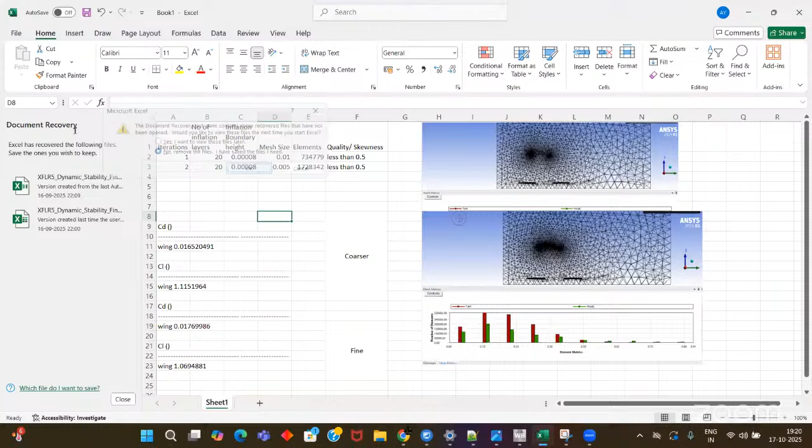So let me create another table wherein I'll write serial number, and mm, then CD, then velocity, then mechanical power.

And mechanical power is nothing but drag into velocity. So it is nothing but the multiplication of drag into velocity. So we'll be computing the drag here, FD. So let me write another way, mechanical power, CP we can write, mechanical power coefficient. Okay, so we'll be doing it for two cases, serial number one and serial number two. We'll be doing it again for 20 meter per second. Okay, both the cases.

And here is the performance sheet, and below that will be the mesh sheet where we'll write the serial number, then, sorry, number of elements, then element size, then inflation layer, then first layer. Okay, so let me wrap it. Okay, so this is also 1 and 2. So numbers, elements, and all that, we'll write it down.

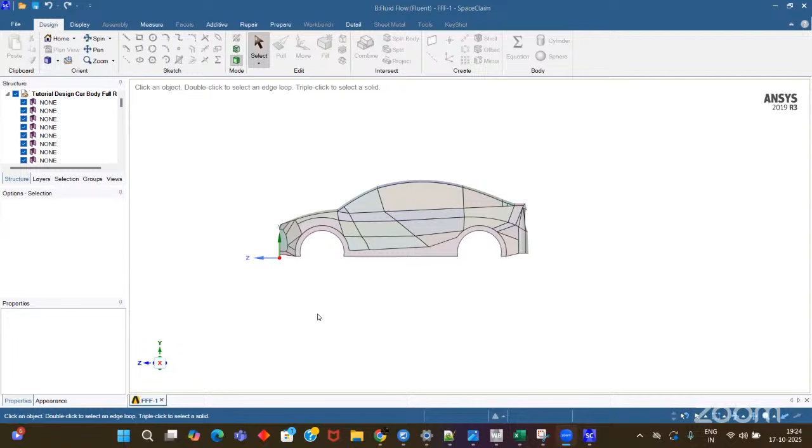So this is an electric vehicle for which we are trying to evaluate the performance of the complete system. So performance is basically very generic. So performance totally depends upon how you are trying to view that complete system. So I'm trying to view that complete system on the basis of fuel consumption and efficiency. So definition lies on.

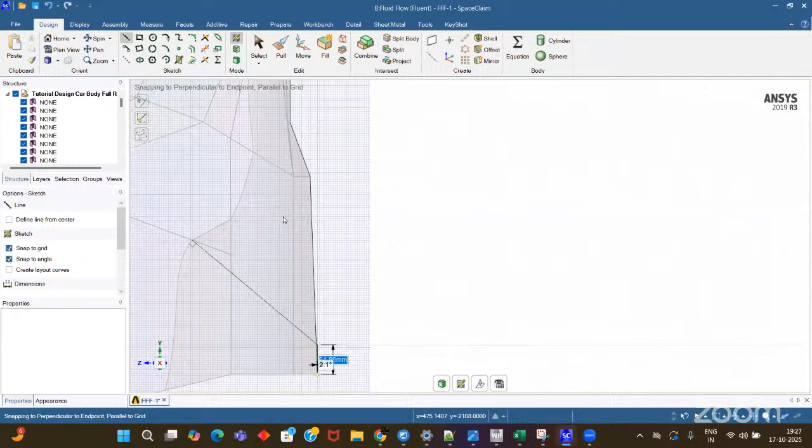So performance is a very generic term. So it totally depends upon your way of understanding how you are seeing the performance. For me, the performance is actually the fuel consumption and the aerodynamic efficiency of the system. So my performance definition will actually try to prove that the current electric vehicles that we are actually functioning are better in terms of efficiency. Yeah.

Now, again, actually trying to trace this. So this is a workshop class, so don't expect me to only teach you the theoretical portions, but it is a bit experimental also. So there are things that will require your attention to the maximum extent. So try to be patient enough and follow me with the things that are happening in the class. If I was only telling you about the PPTs, it will be very easy for me as well. But I prefer not doing that on a continuous basis, rather explaining you the complete thing with an example problem. So that is how I believe will work for you. Yeah.

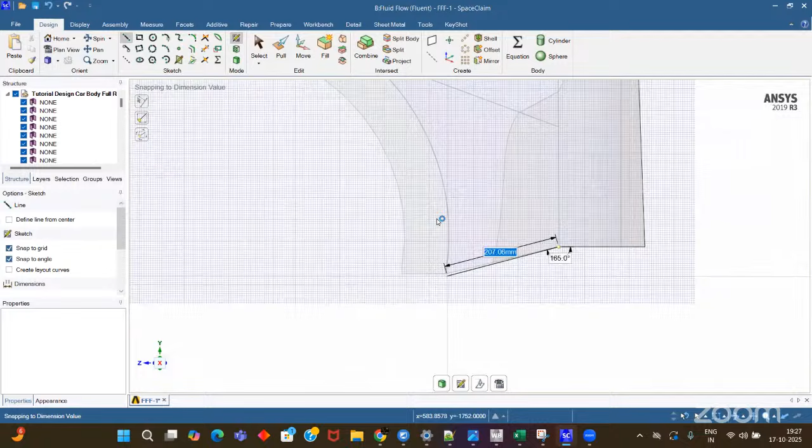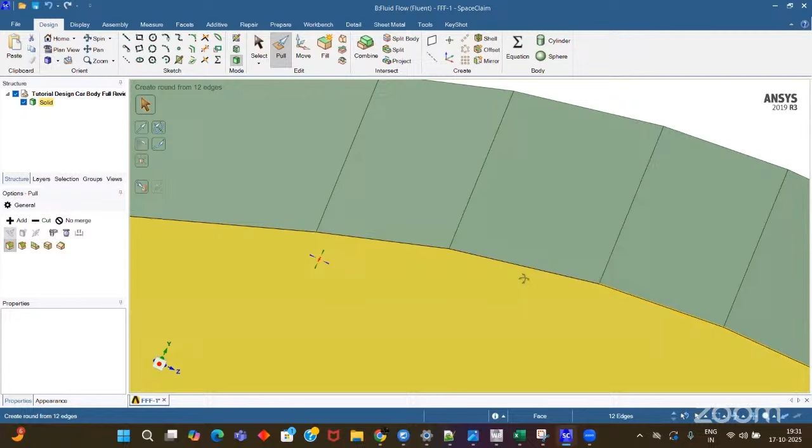Okay, so this is the model. Now I'll try to extrude the model. So pull and extrude the model. Yeah, now I'll try to give it a car look. So I'm trying to give it a fillet. So selecting the edges particularly here. Okay, so pull and

yeah, it is done on this side. Now similarly on this side as well. So I'll pick this, pick this, pick this, all the edges on this, and particularly all the points that are actually covering this part. Now the frontal portion as well, trying to make it more aerodynamic, and the back portion as well.

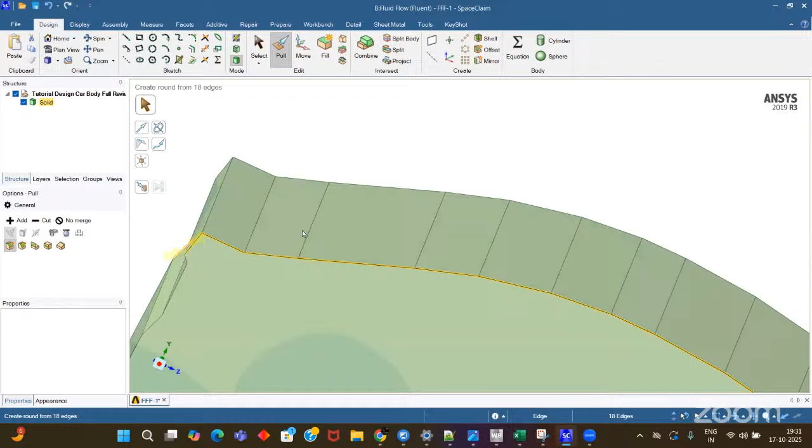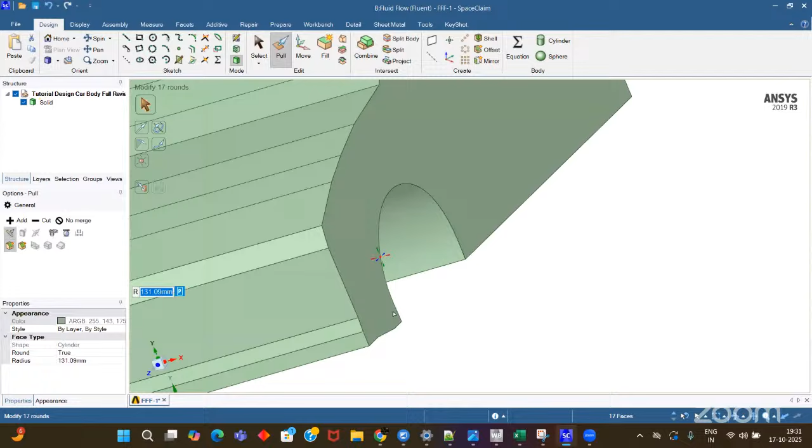So that the vortex doesn't get formed at the back. So there should be a smooth flow of air at the back also. There shouldn't be an abrupt edge portion that the thing faces, which will actually cause the flow to terminate and actually it will stall. So that I don't want. So for that purpose only, yeah. So this is done. Now let me actually make it in a proper way. So make it 90 degrees.

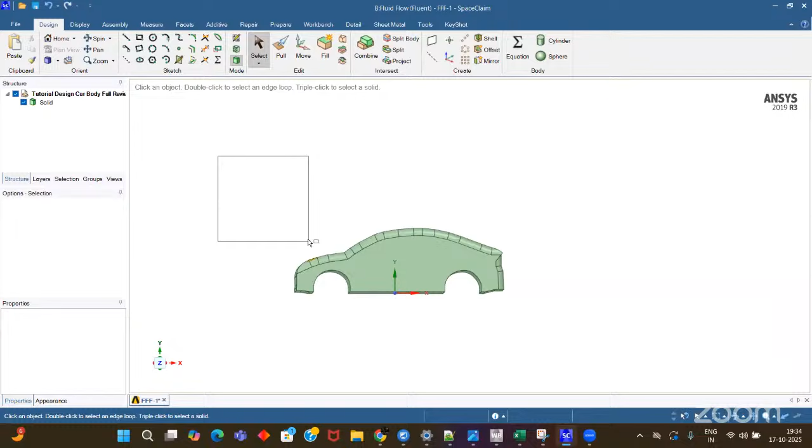So your screen is not visible. Okay, now this shows properly. So X direction is here. So now let me create a domain around it. So let me prepare a domain there and then enclosure as I did it yesterday. So let me do it over the symmetrical planes. So we bring this design, move it to the center. Okay, so moving it to the center.

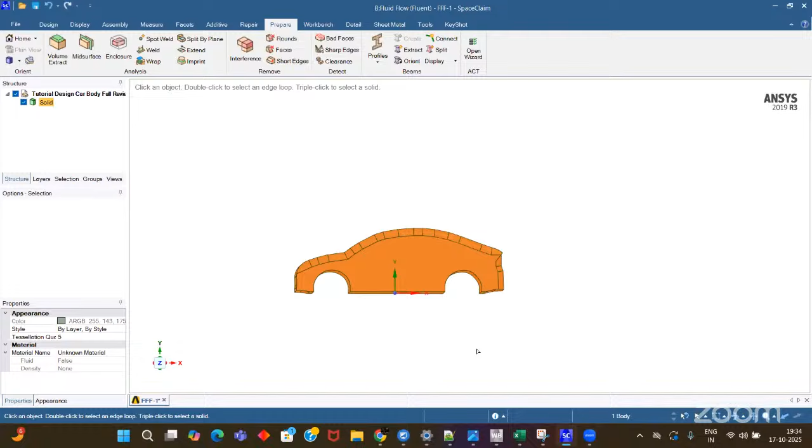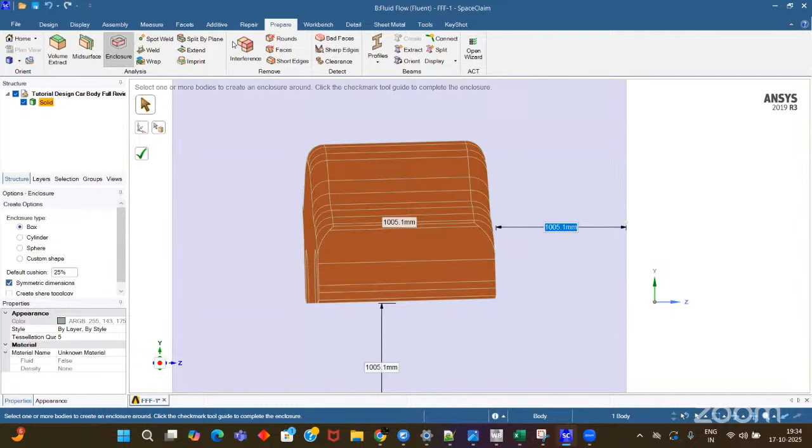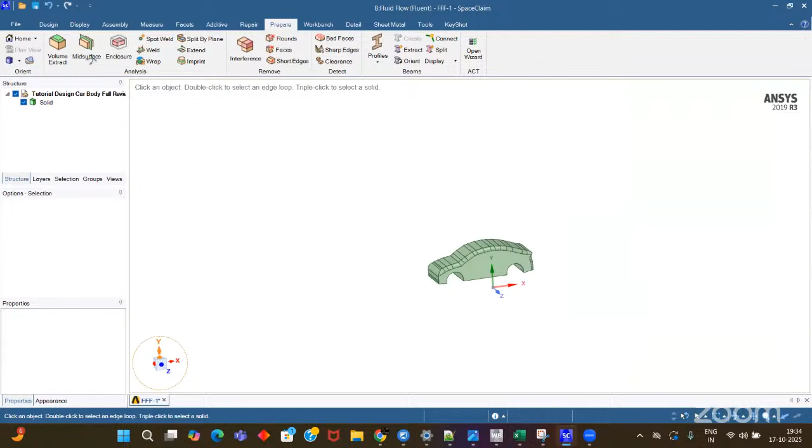Now I'll actually choose a plane and I'll pull it. So I'll actually bring it this far and I'll actually cut it towards its center. So pull, cut up to this point. Okay. So this is now the symmetrical plane. So now let me create an enclosure. So prepare enclosure symmetric of 1000, 1500, 2000, 2500 maybe, 1000.

So now, starting from here, it happens like this. This is the symmetrical plane. Now I'll suppress this.

Just give me 2 minutes here. Amar, can you hear me? Yes, but your screen is stopping and resharing again. So is it stopping automatically or are you stopping it? I don't know why, let me reset the Wi-Fi. Just give me 2 minutes.

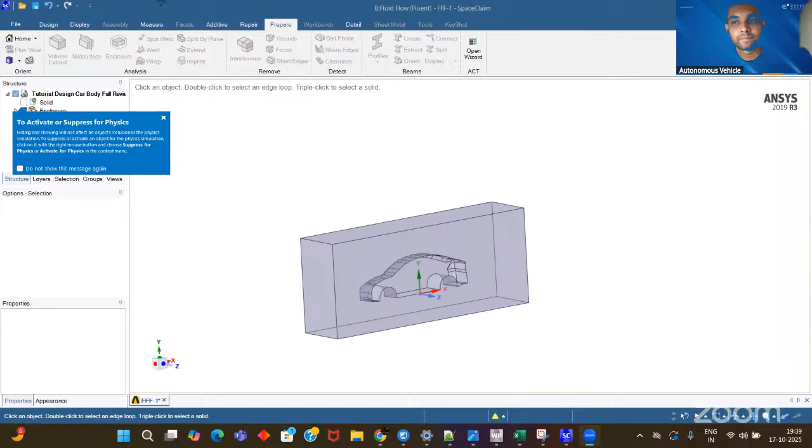Amar, shall I proceed? Okay, perfect, so this is done. The cavity is made, now we'll go towards the next session.

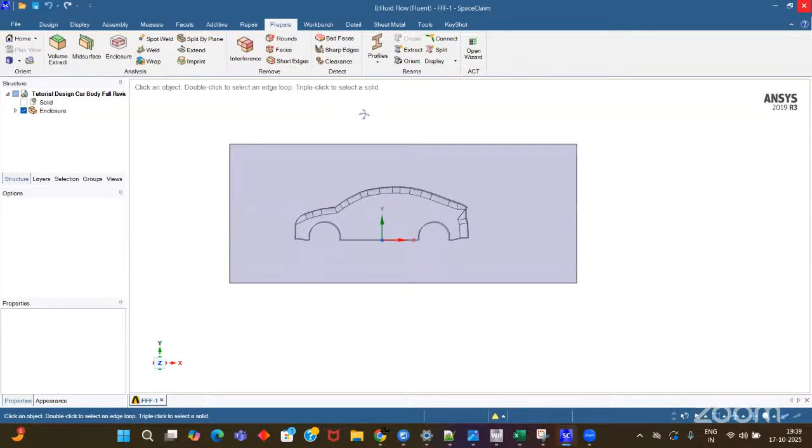So mesh creation - we'll only do one kind of mesh. Yesterday we figured out that medium fine mesh, only one kind of mesh would work. So rather than repeating stuff again and again, we'll stick to one kind of mesh only. We'll take an element quality mesh that's suitable in size, pick it up, and follow that.

This will be taking number of layers as 20. First layer height as 0.0001, that is 1 into 10 power minus 4.

Now let me first name it. So this is the symmetry plane, I'll write it as symmetry. Now this is the inlet. The screen is... and this is the outlet.

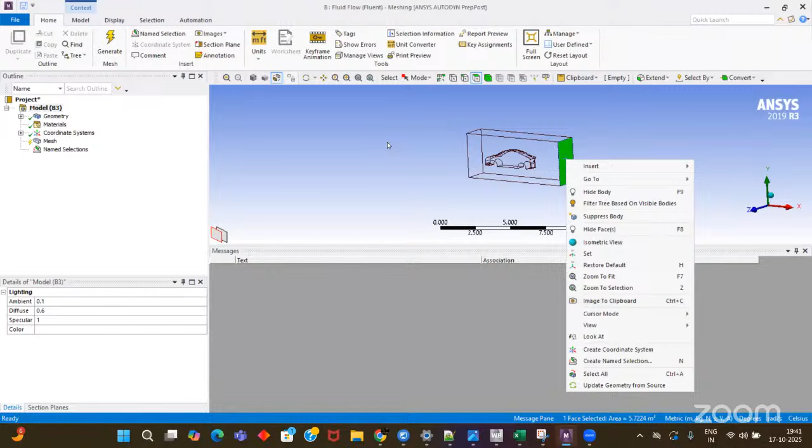Sorry, is the screen visible? Yes. Is the screen visible? Yes, yes, it's visible. It's visible, right? Yes, the screen is visible.

Okay, fine. So I have made inlet, I have made outlet. Now I'll declare the walls - so these are the walls. This is done completely.

Now let me actually name the car inside it. So I'll name the entire body as car.

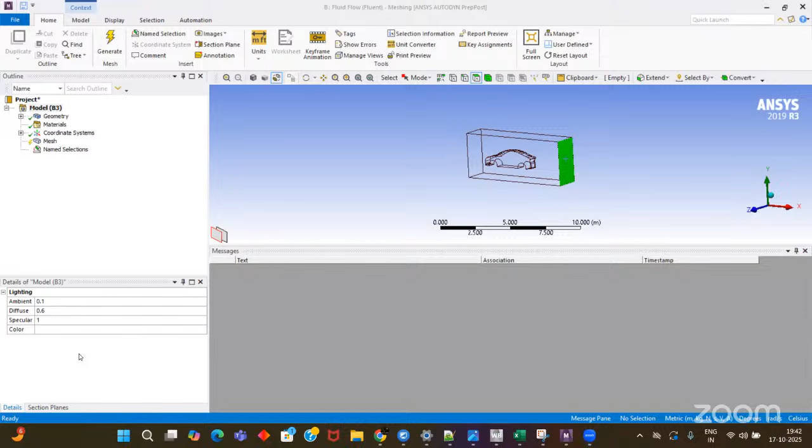Now mesh will be taking as 0.5 outer body, and this I'll be taking as 1.1 as the growth rate, that is 10% growth rate. So this 10% growth rate we'll be taking here.

Now, after this 10% growth rate, we'll be declaring the inflation layer.

Now, after this, I will be naming first - we'll be doing the sizing of the car. Name selection, here car, and this will be giving us 0.0. How much have we taken? We have taken 0.05.

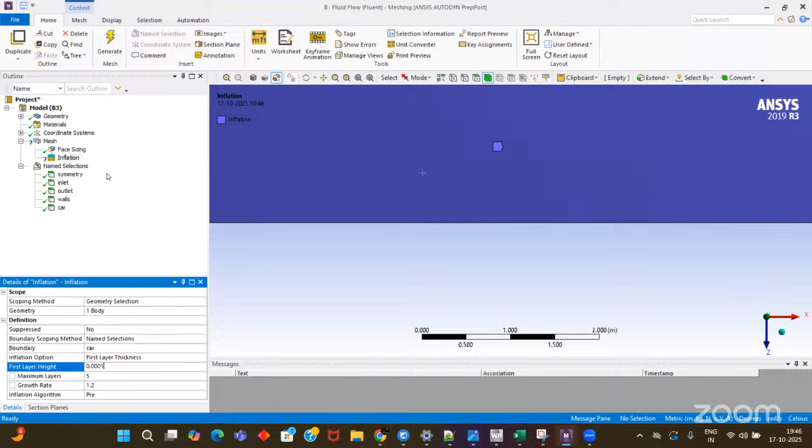Now we'll try to mesh it. Let me see - we can make the mesh more finer because it's a bit coarser, I guess. So let's not take the risk, we'll do a finer mesh. We'll give it as 0.01, 10 mm.

Let me see how much is the number of elements in the mesh, and based on that, we can maybe do the other sizings as well. I don't think it will be much more intensive computationally, so if it is not that intensive, let us not do it.

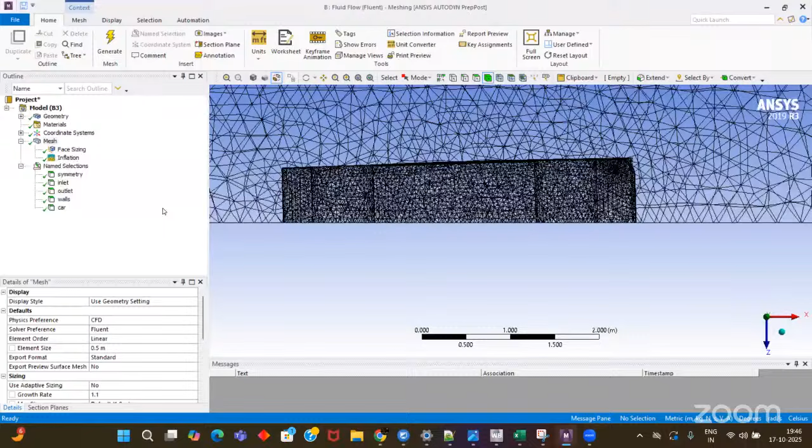But it takes some time, so rather than showing you on a timely basis, we can make it work. I showed you the finer mesh right here, so now rather than doing a finer mesh, I'll do a coarser mesh with only 0.5.

So it is meshing right now. Let me show you, yeah it is meshing, but it is taking a lot of time with the 10 mm mesh size.

So let us revert it to 0.05, and in that scenario, let us mesh it again. So it is meshing.

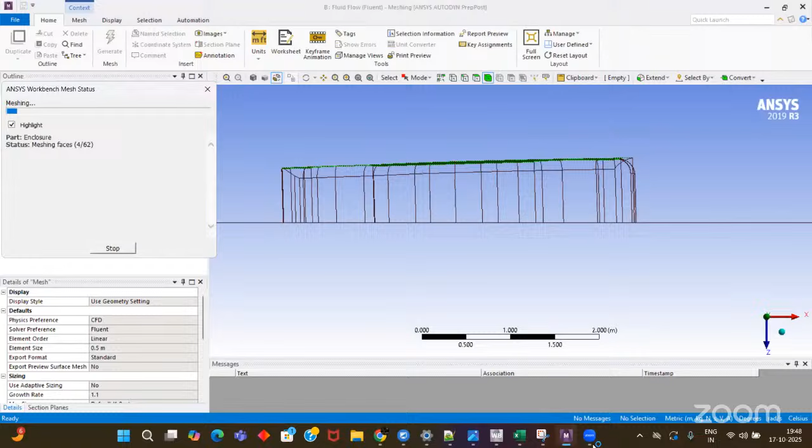Now let me see how many elements are there. So it is around this, okay, just paste it here - number of elements. Okay, now let us take this to the updation.

Before that, let me show you the inflation layer that I'm talking about. See this inflation layer - this will capture the shear layer properly. Everywhere at the corners, at the sharp places, these are properly defined, so this will not allow an abrupt jump, and it will capture the boundary layer near the surface. That is the significance of inflation layers.

Okay, so now let me close this up, and after closing it, let us open the fluent part. In the fluent part, as we discussed yesterday, double precision, and with double precision, a number of parallel solvers you switch on, and in the parallel solvers condition you click here, number of solvers as 5, hit OK.

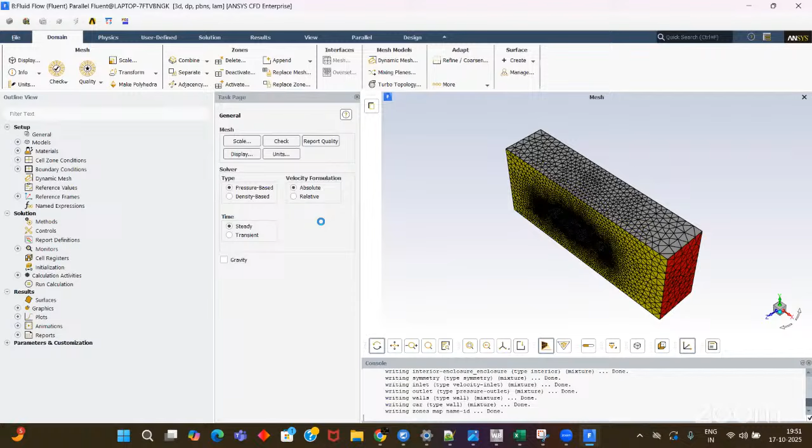The reason for the moving walls is that when the air moves from the inlet, it doesn't face a zero terminal velocity at the wall section, so it experiences constant air throughout the complete surface. Instead of this parabolic distribution, it faces a constant distribution as it faces the atmosphere, so that it resembles an infinite boundary layer enclosure, and there is no restriction of the flow.

So now this will be computing some inlet and reports will be for the areas, right? So projected areas along the y-axis compute 2.92. So this will be copying and going to the reference values. This is 4 meters, this is enclosure.

And now what we want to report - drag, we want to report CD. So CD will be for the car, and CL - CL is not needed, but still for the sake of completion we are doing it. CL is not needed, just to confirm.

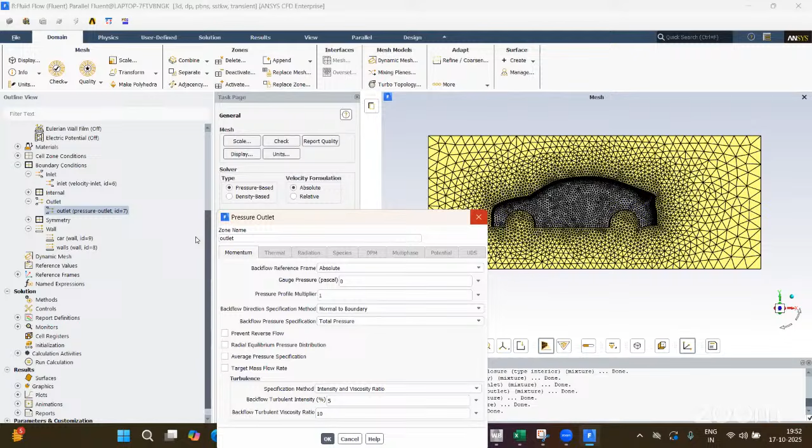Now let me set iterations, solve. Now this is solved. Let it solve.

You can see it is getting plotted now. I think it will converge very fast because the mesh is fine and doesn't require much attention to convergence criteria. So you can see the CD plot and CL plot both are behaving wonderfully, showing a negative lift at the moment. So the aerodynamic design is actually working fine and properly.

If time permits, we can do a post-processing also of the pressure contour to check and compare between the two designs, to check the boundary layers and how the separation is happening.

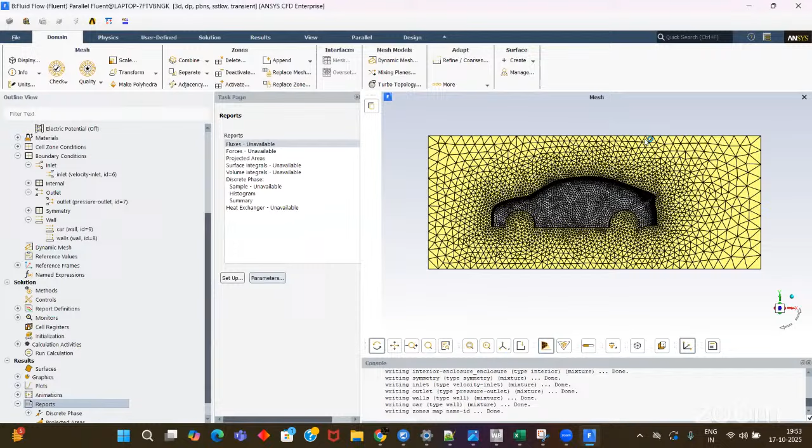Before that, I think it will converge fast, but let us see. The continuity has reached -2, -3 almost, and XYZ velocities have also reached -4. The criteria is -4 and -6, so I think it will reach very fast. That's not a point of concern at the moment.

Yeah, so it is actually converging, still running. -3 is achieved, almost -4 is achieved. So now I think it will converge in the next 10 to 20 iterations. That is not a problem to worry about.

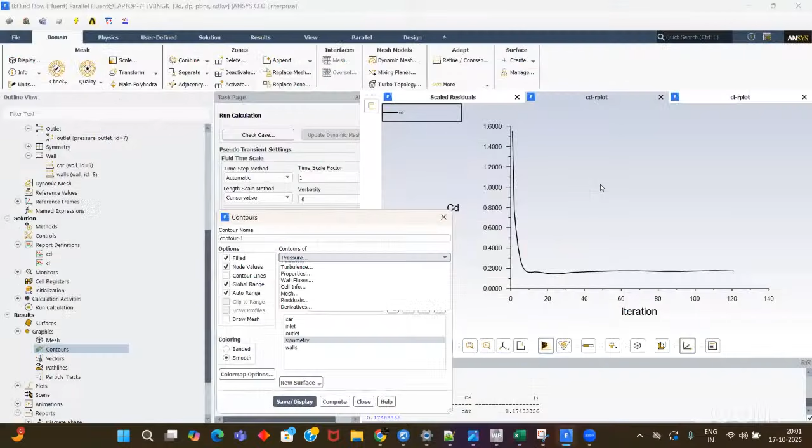That is the reason why the separation is because of this termination at this point, it is not because of the aerodynamic surface. If the surface would have been a bad design, then separation would have started or been more prominent here, like it happened here.

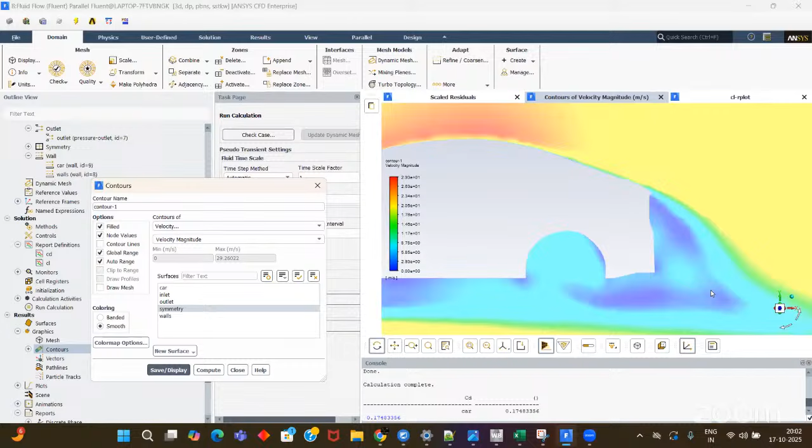It could have happened here as well, but the design is fine aerodynamically. So now let us compare with the other design. Before that, let me copy, let me snip it maybe. So this is the one, this is the first one. Let me snip it and tag here. So this is the first design.

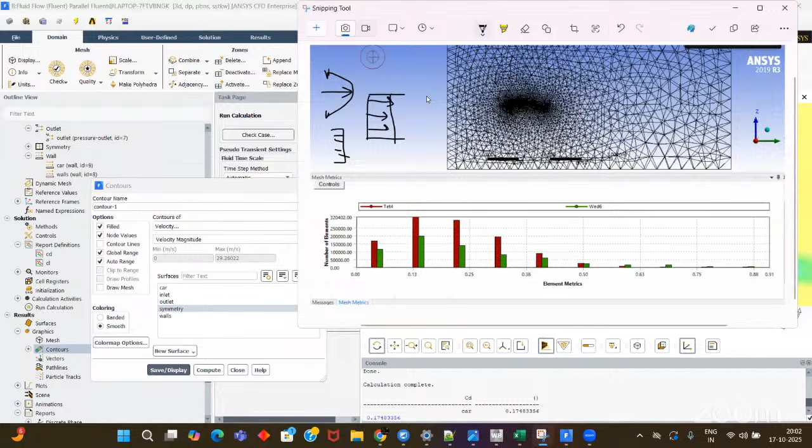Now the second. Before that, let me close this up. Meanwhile, let me bring another Fluent here and copy the other part. E-car concept, yeah, so this one, let me open. Now we'll be comparing between two different autonomous electric vehicles, and see how the performance is actually varying between the two, to compare its mechanical efficiency and aerodynamic performance, like we did in the first case.

Okay, so I think, yeah, so now it is there. Let me turn it up.

The best part of coefficient comparison is that you don't have to worry about the forces. You can just compare the coefficients with each other, and that will give you a very fair idea about the performance of the vehicle. So rather than completely relying on the forces, you can still comment on the performance as well. That is the benefit of it.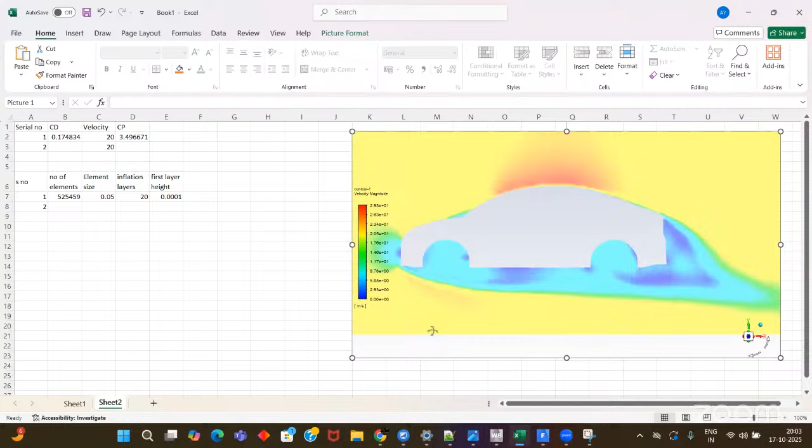Okay. Sorry. So let me do it this way. Okay. So now this is correct. Now let me see if this is fine completely. So let me try and compare it. Completion is the key. Or else, yeah, leave it.

So now create an enclosure out of it. So before enclosure creation, let me do a symmetry thing. Okay. So design, for the sake of this thing, symmetricity. Let me do this also symmetry. Full. Now keep it aside to a certain distance. Move it here.

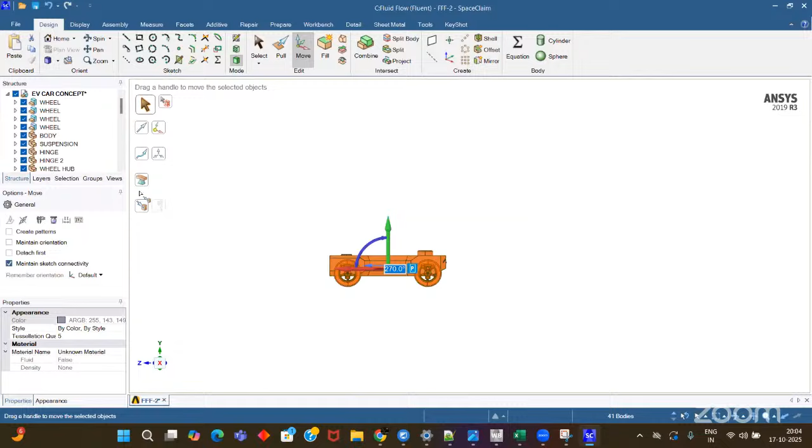Now pull, cut up to the cut. Oh, sorry. Pull, cut to cut. Oh, sorry. Yeah. So yeah, now let me create it.

So we share the screen. Again, I don't know why it is always disconnecting every time. But yeah, now let me do it again.

So design, start. Yeah, so now before pulling, let's keep this to this part, this side, pull up, up to. I'll do one thing. Let me do this like this. Let's see. So that was not a problem. So prepare enclosure. Let me prepare an enclosure of it.

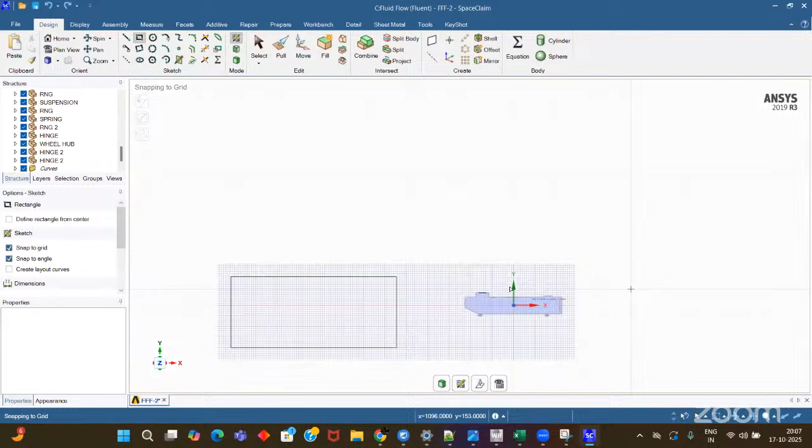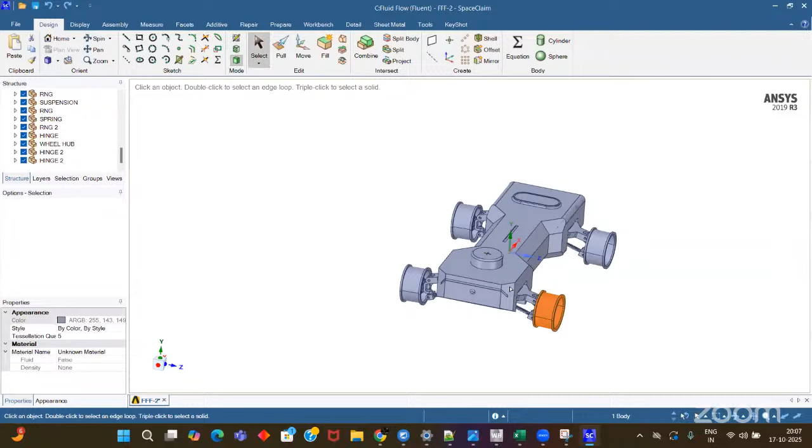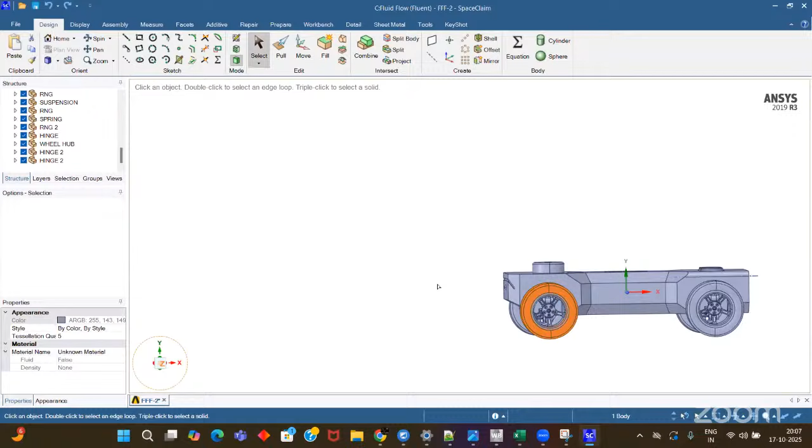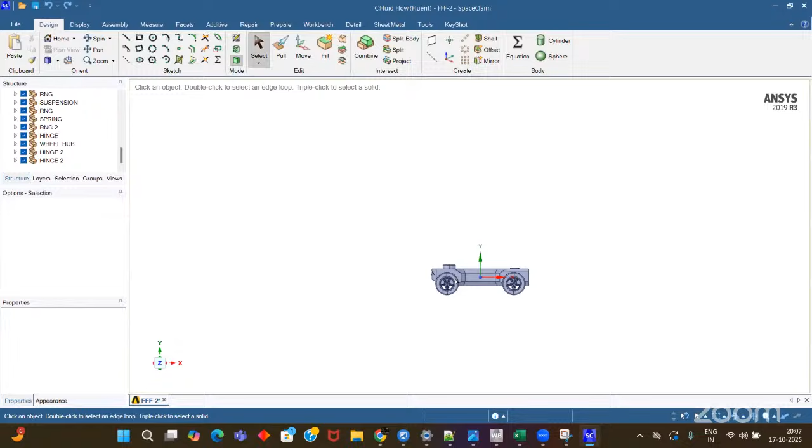Yeah. So in the next class, I'll tell you what we will be starting. So in the next class, we will be getting an introduction to autonomous vehicle and the concepts regarding it that we are covering in today's class and yesterday's class. And thereafter, we will be starting straight away with the project because it's a very short course. So not wasting your time digging too much into details of technicalities.

I'll take two UAV concepts and then compare that as well. So comparing the performance of fixed wing UAV, a quadcopter UAV, and then a large aircraft, and that's how we'll be covering that. So maybe, yeah, three classes it would sustain that as well. So it would be completed in that. So yeah. So let me see.

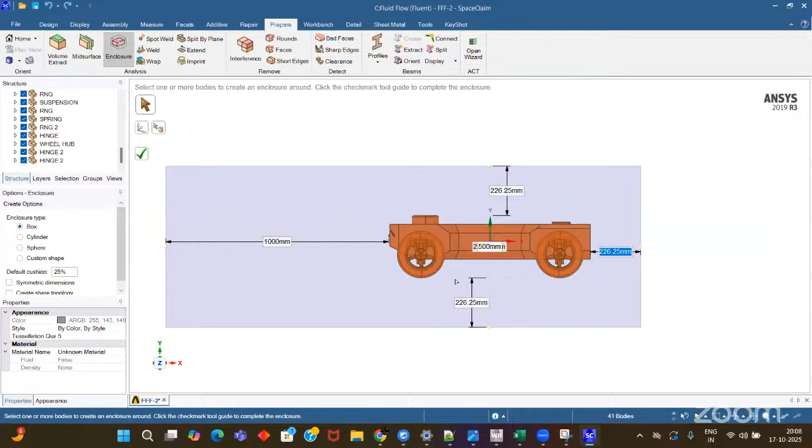Now I would have liked if it would have been a longer class. We could have touched upon concepts of MATLAB as well and try to make you understand how to do Simulink and MATLAB modeling of these autonomous and electric vehicles. But I think that will be too much to offer as per the timing constraints in this class coursework. So rather we can take it maybe in some other class down the line.

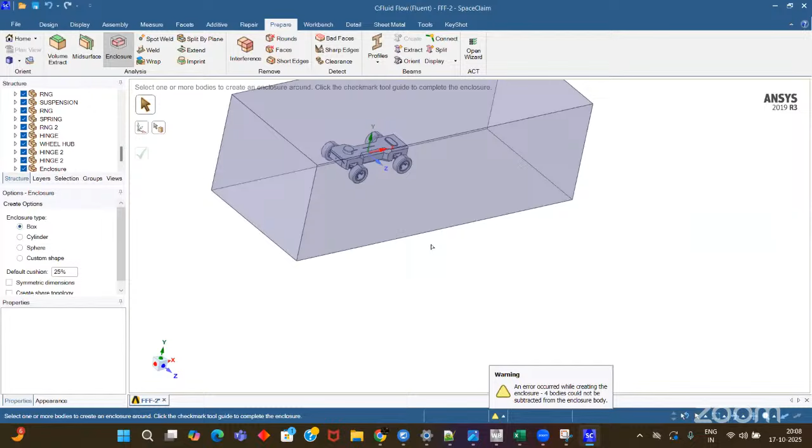Yeah, this will be the walls, this will be outlet. This will be inlet. And this will be the motor vehicle section. So yeah, that is there. After that, these things are done in outlet walls.

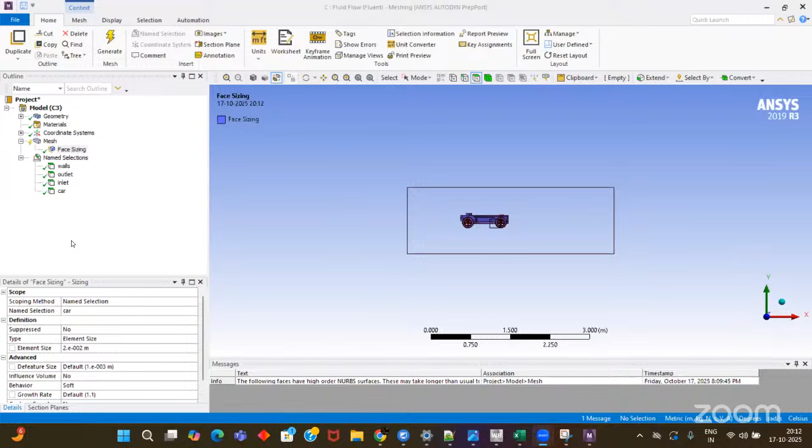So inflation layer first, we select the complete thing, then this car. Smooth transition, first layer thickness. Number of layers is 20. Sorry, first layer height is 0.0001. This is 20. This is 1.1. Okay. Now let me mesh it. So it is meshing.

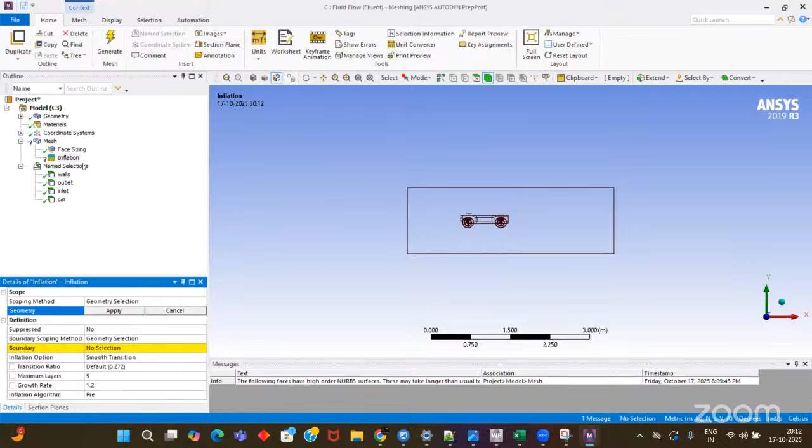So let this happen. After that, once this is done, we can maybe do the analysis of this and compare the performance of both the autonomous vehicles side by side. So this is actually the electric vehicles analysis as well as ground autonomous vehicles. So basically, in the complete system, there are two things. So this is the ground autonomous vehicle. After this, we'll be doing the aerial autonomous vehicles. Aerial autonomous vehicle is a different thing.

So the aerial autonomous vehicle will be taken into consideration in the coming class, wherein we'll be also redefining whatever things are there and also taking into consideration these autonomous vehicles side by side. So the aerial autonomous vehicle and the ground autonomous vehicle, both things we'll be doing, and then coming to a conclusion on which is feasible and how to approach the problem in a sustainable manner. Okay.

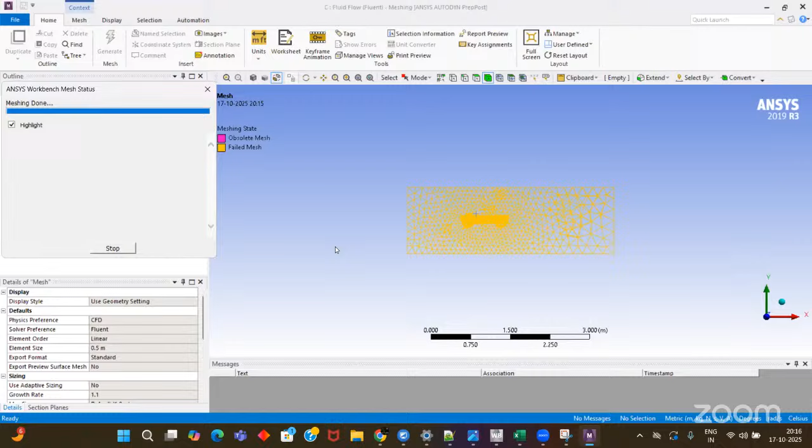So we have the 2D model. So we can create it as we created in the last one. This geometry we can create and then create the enclosure of it and then compare both the ground autonomous vehicles side by side. So yeah, that is a better idea. So in that manner, we can compare both the things by creating our own geometries and then coming to a consideration as well. So let me give, yeah, this is a better one. So, right. Yeah. So let me complete it from here.

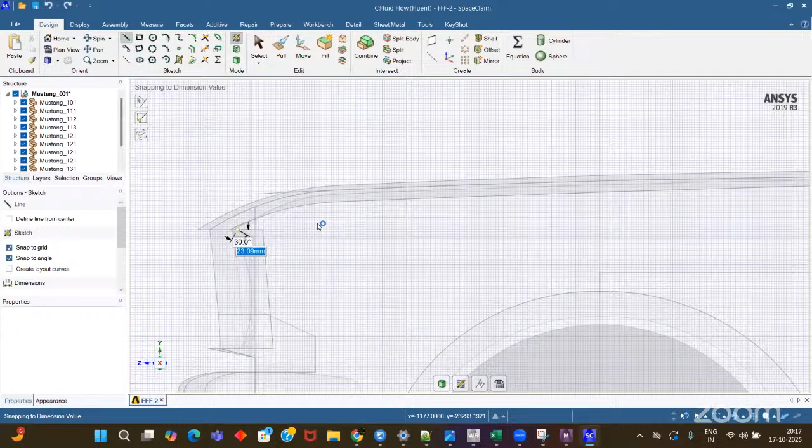Let me finish this and take a curve so that I could complete this in a proper way, right? Now pick this again and bring it till here. Finish it. And then again a spline. I'm doing this to help you understand how to recreate the geometry if it's very difficult to understand, and then extrude it. So these are the tips and tricks that you need to understand for proper modeling.

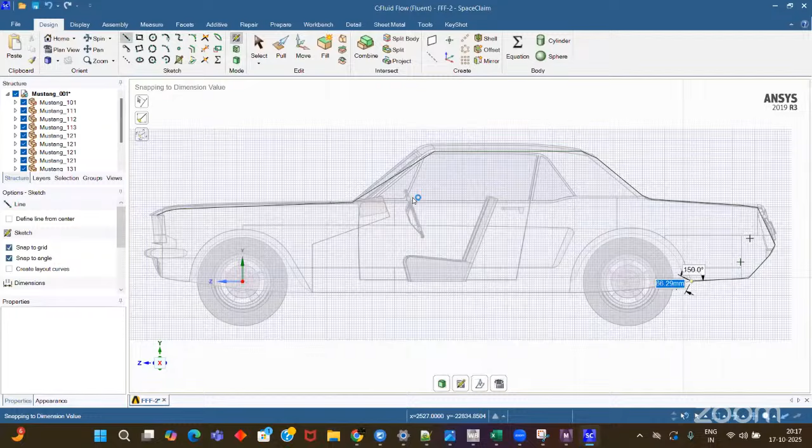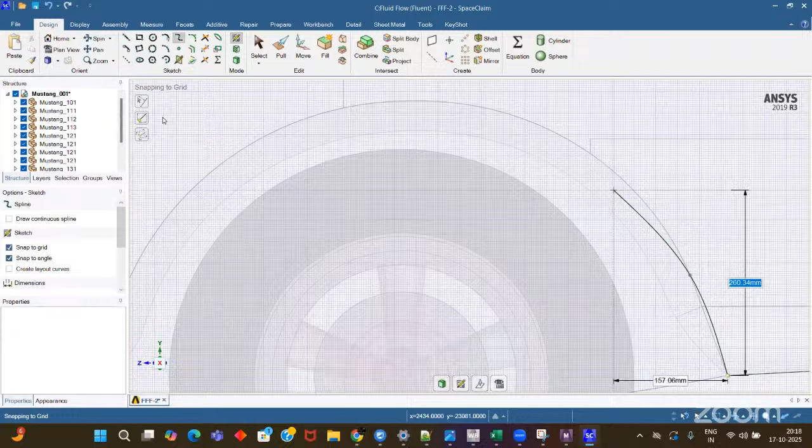Okay. Yeah. So this is done. Now pull it. I'll delete this completely first. I'll delete this completely, I'll bring this and I'll pull this. So I'll pull this. This is a better thing, right? Because then it creates a symmetricity between the two designs that we've done. So now,

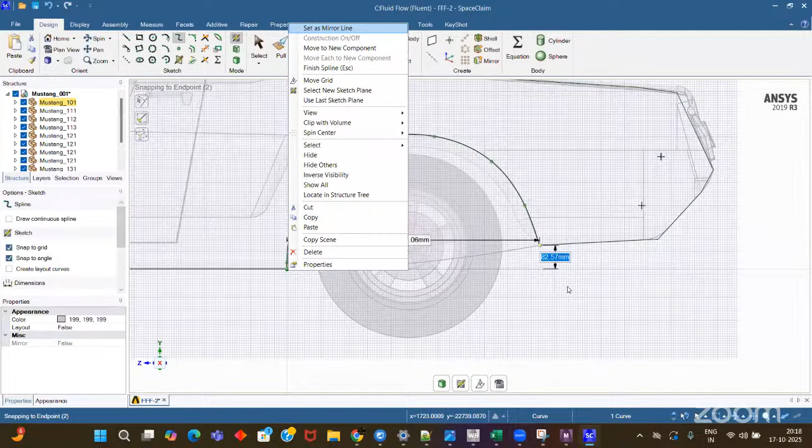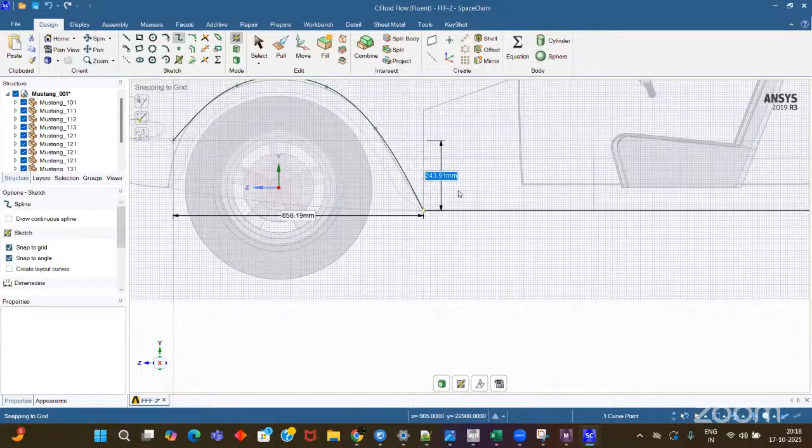So Amar, I'm audible, right? Okay. Sure, sure, sure. Am I audible now? Is it fine now? And the screen visibility is clear, right?

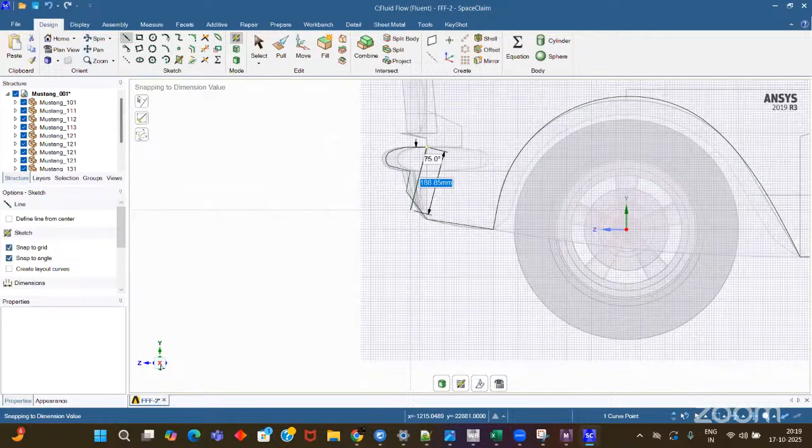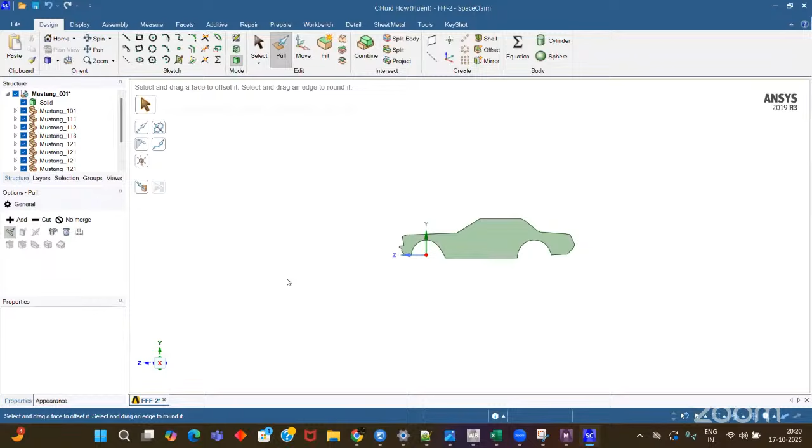So now this is done. Now let me take this into notice as well and then do that. So both the places are done. Now let us create a symmetric plane. So basically like this, and this. So now this is fine. Now let me bring this up to here and pull it till the central plane. Pull, cut up to the central plane. So now this is done. Now let us create the enclosure of it. So prepare enclosure.

So now let me do the dimensioning of it. So this is 1500. Yeah, so this is 1500. This is 500. This is 1000. This is 1000. This is 0 because it's a symmetric plane. This is 1500. This is 1000. This is 1000. This is 2500. Okay, so now this is done. And this is your internal model structure. So press this, and then your model is ready. So now this becomes a very nice clear-cut comparison of the two.

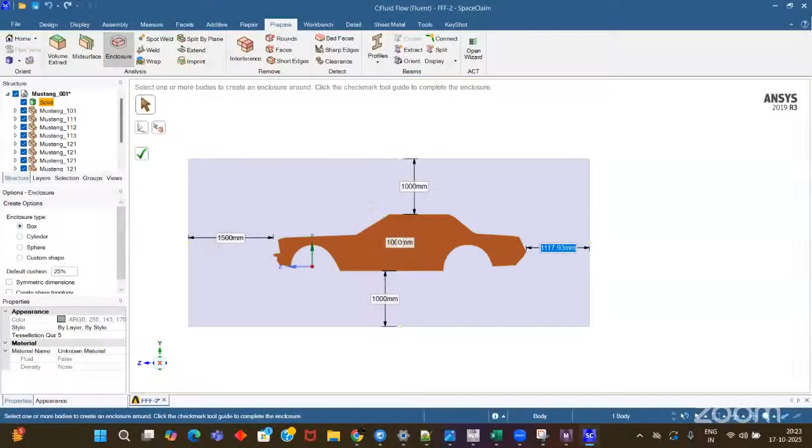So now I close this and I open this. Okay, opening this.

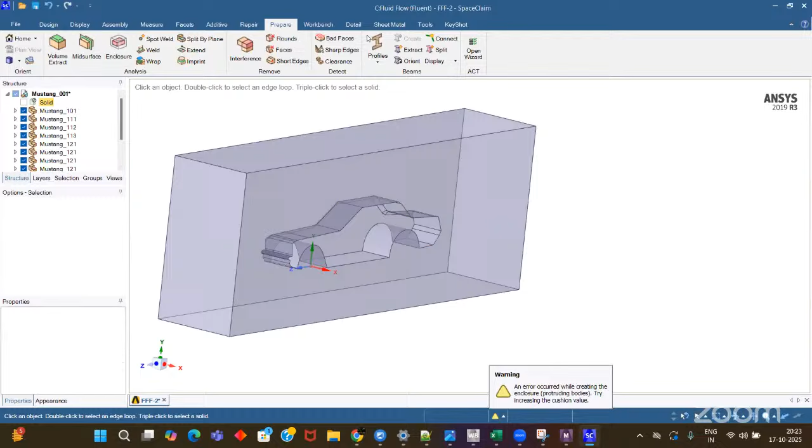Is it visible now? I think it should be visible to you. Can you please recheck it? I think it should be visible. The screen is visible, Amar, right? Yes, yes, it's visible. Screen is visible, Amar, right? Now it's not visible. I think it's loading though. Okay, it's visible, yes, right? Okay. Yes. Yeah.

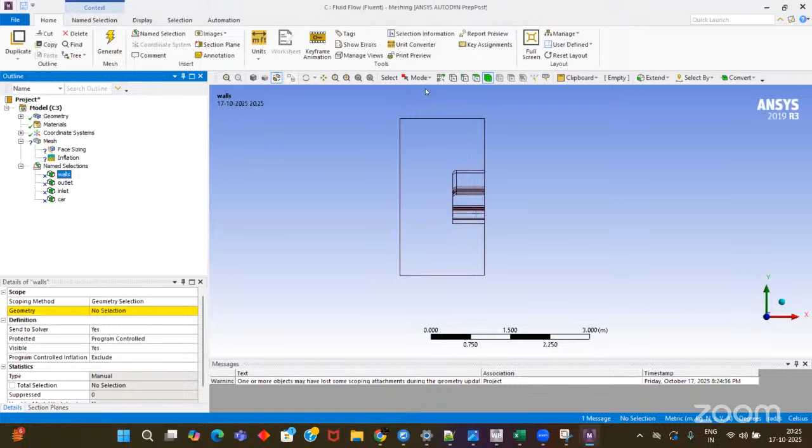So let me make the things again. The naming part. Delete. Yes. So this is symmetric plane. Symmetry. These are the walls. This is the outlet. This is the velocity inlet. Similarly, as we did in the last one, we are doing it here as well. Just the geometry is changed and rest everything is same. So we are doing the same process to compare the aerodynamic coefficients properly. So this is the part.

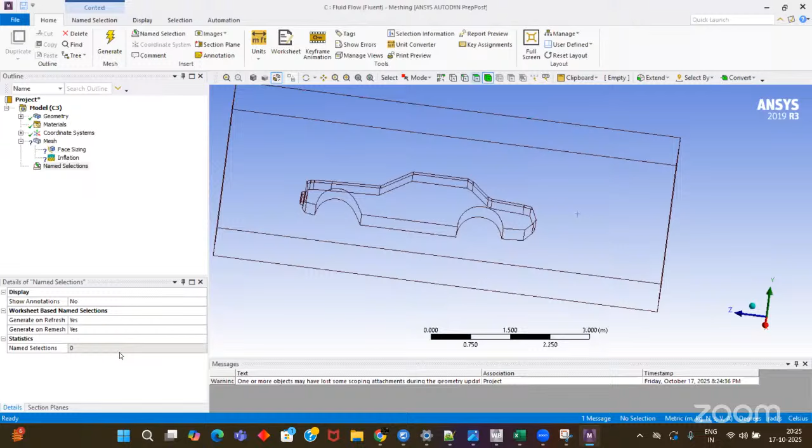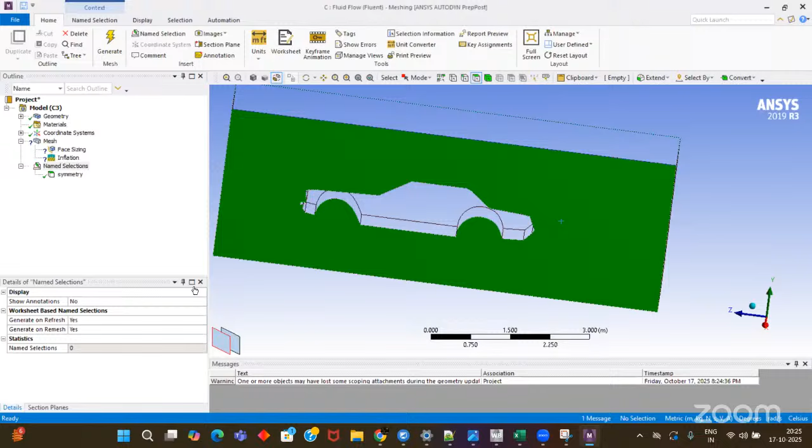Now let me see here. Before that, here, let me see. Yeah. So now single select body, apply, and okay. So yeah, this is done. So now we'll compare this as well. We'll see the number of elements here. It should be the same because we are dealing with the same kind of structure. So everything is same. This is same. We'll write it here. And now we'll close this.

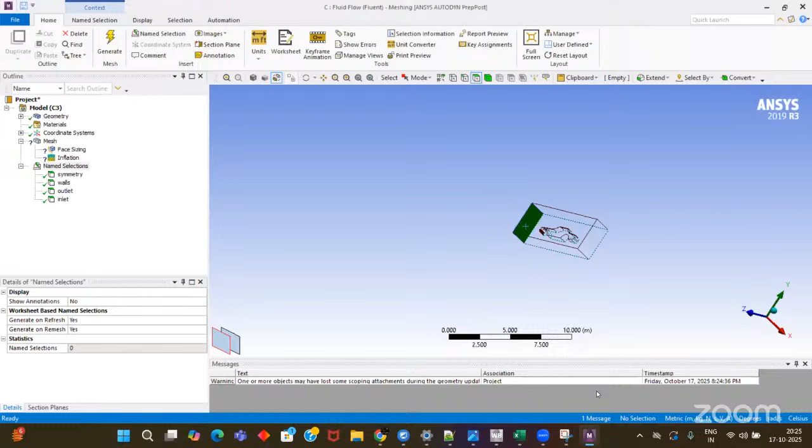Meshing part is done. Now the final part, that is the updation and setting up in Fluent. Yeah, it is actually updating. It's taking some time. Yeah, so it is done. So now let me set up the model. So double precision, parallel solvers, solver processes 5. Okay. Doing the same kind of thing here as well to get a comparison feel of the cases on both the sides, and thereafter completely comparing both the things.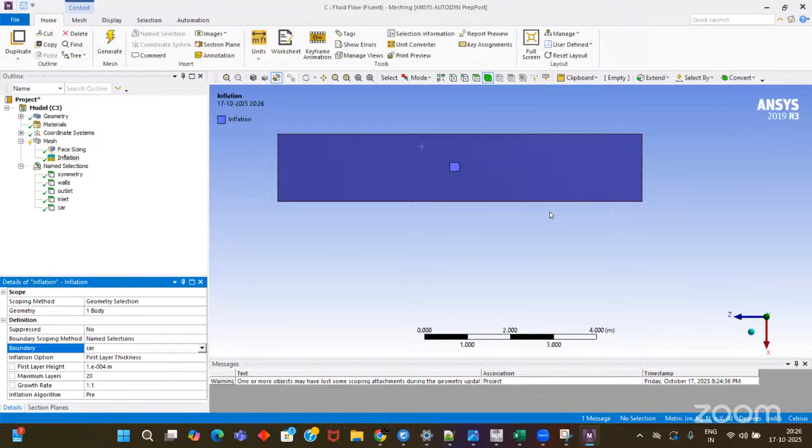So you can see here the inlet, outlet, walls, symmetric plane, and car. One thing I have mistakenly done: when we assign the velocity, we should assign it properly, because see here, the z direction is the velocity. It's okay. Other than that, everything is same. So laminar flow, no turbulence, turbulence model as k omega SST. Now we'll set the velocity as 20 in the negative z direction. So this is 20. Okay.

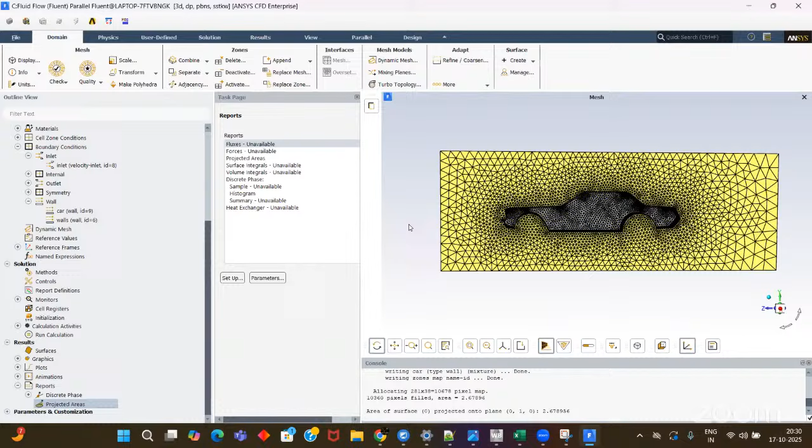You can see CL and CD are getting progressed, and CL and CD are getting progressed. So you see here, CD is also there.

So let it happen. By the time, do you guys have any doubts? Can you please? Umar, can you see anything on the screen as a query or no? There is no any query actually. Okay. Yeah, but the screen it's just showing... Vehicle started sharing screen, but nothing is visible. Yeah, yeah. Please tell. Yeah, now it's fine.

Okay. So it will take around 5 more minutes to converge, and then thereafter we'll post process the results. We'll do a bit of understanding of the contours, and then thereafter we'll be in a good position to say that we have done complete understanding of the analysis on ANSYS for the ground autonomous vehicles.

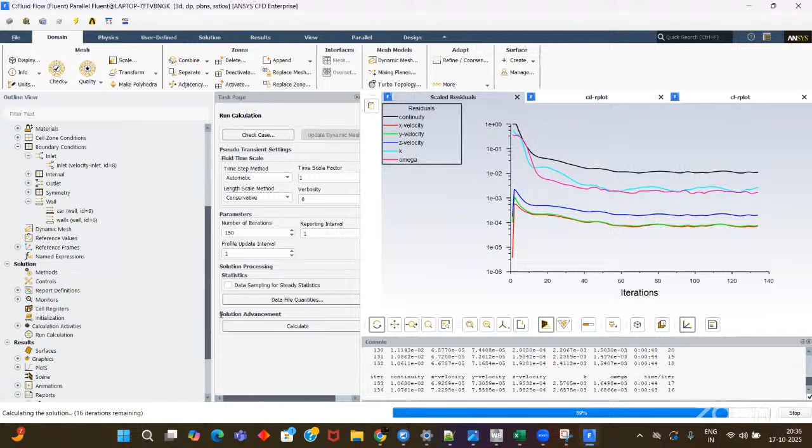Yeah, so this is done, and this is done, and then let us compute the results. Let me give you this. So car, this. So this is the CL. Sorry, this is CD. So this has lesser CD. So that is surprisingly very nice. And you can see the mechanical power loss is lesser in this design. And that you'll see in the contours also.

So let me give it up here. Horizontal symmetry. Look, yeah. See here, the difference is so less. So let me plot velocity here. See, the velocity is disturbed flow here, but it gets disturbed in a very unconservational manner. It happens everywhere, but as you see the disturbance of the flow in the first case, you don't see it here in the second case. So this is the second one.

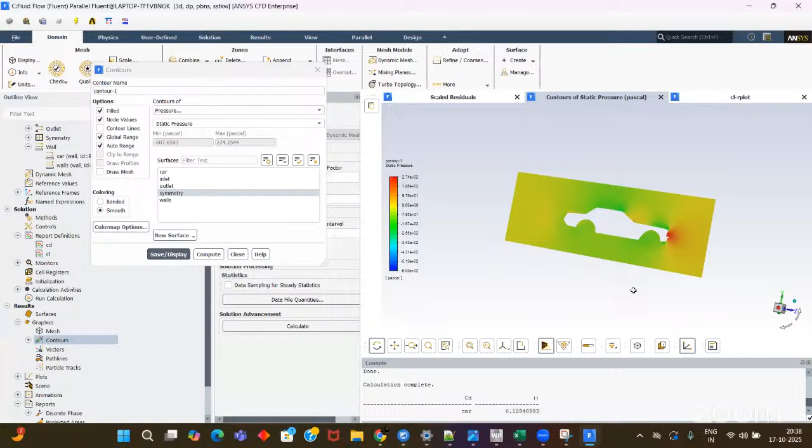So let me put this also in the loop, and this gets the completion. Yeah, both the cases, if you see, the negative pressure zones are more over here when compared. It is more bluff here at the back, but here this is causing a much more reduced pressure flow at the back that is stopping the flow. Because of which, in this first case, the coefficient of power is higher, causing a larger mechanical loss, and also the difference in the geometrical body.

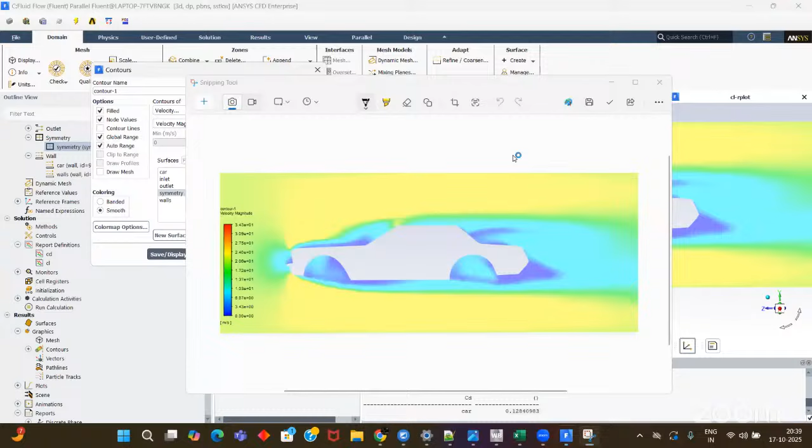So if you make it more aerodynamically feasible, if you make it more aerodynamically sleeker, it will be much better in performance. So that is how we compared the complete designs in both cases. So we had a complete understanding of the electric or autonomous vehicles in both senses, wherein we did a complete set of aerodynamic analysis, starting from the geometrical loop creation, to the enclosure generation, to the mesh refinement, to the analysis procedure.

So I'll show you one more thing, if time permits. So we have the results, right? So let us actually do a refined case of this same thing and see if the results are varying or not. For the other one we'll be doing it, because that converged faster. So let me take that.

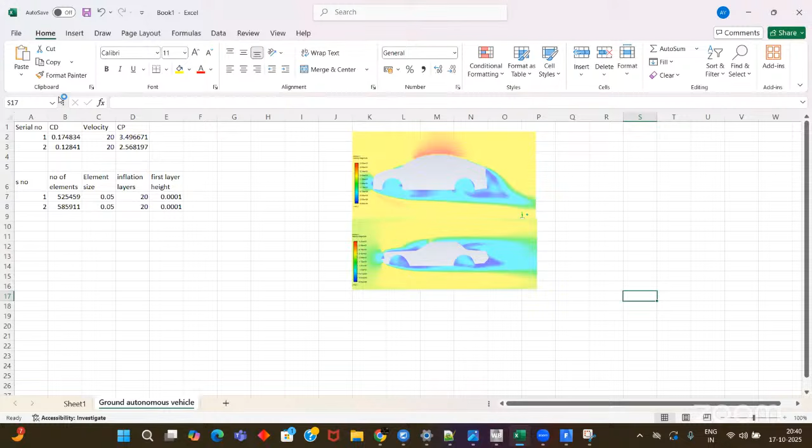Okay. So let it close by that time. Till that time it will open. Let it open. So then thereafter let me set it to 0.003. So 0.03, and this has 0.4. Okay. And see whether the results are varying or not. Whether it is varying or not, that also comes into the picture.

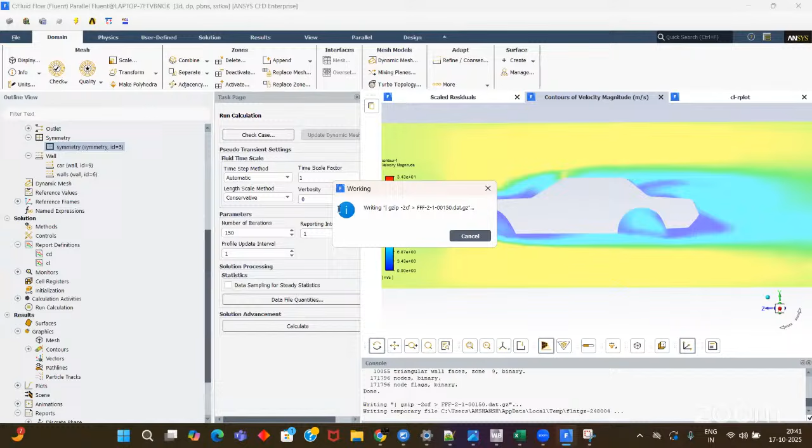So we are making it slightly smaller to observe whether there is any inefficiency in the refinement of the mesh or not. So the mesh is done. Let us see the number of elements here. What is the difference? It has become a little bit more. Let us compare it here. See, it's become almost double, more than double. So this is done. Now update it.

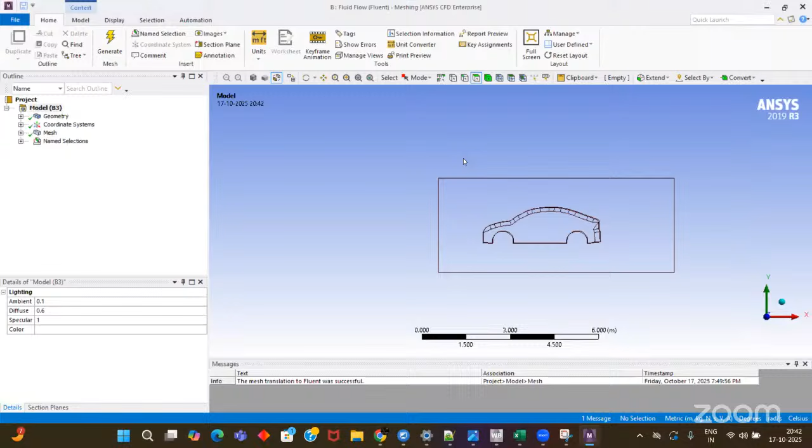Now close it. So after that, let us edit and update it, and see that complete thing in a different set. Number of parallel processes as 5, and then setting up the problem. It won't take much time, another 5 minutes or so, and that will give us at least the trend of whether the result is varying or not. That will also give us a quality check of the mesh we were using for comparing the two autonomous vehicles, whether we are using a correct mesh or not.

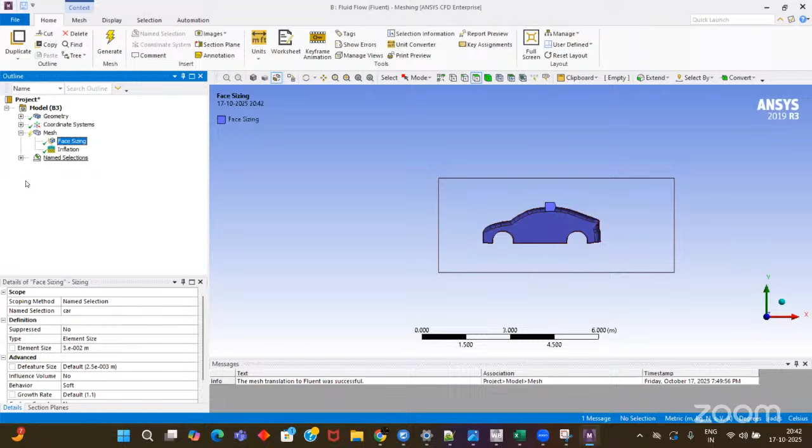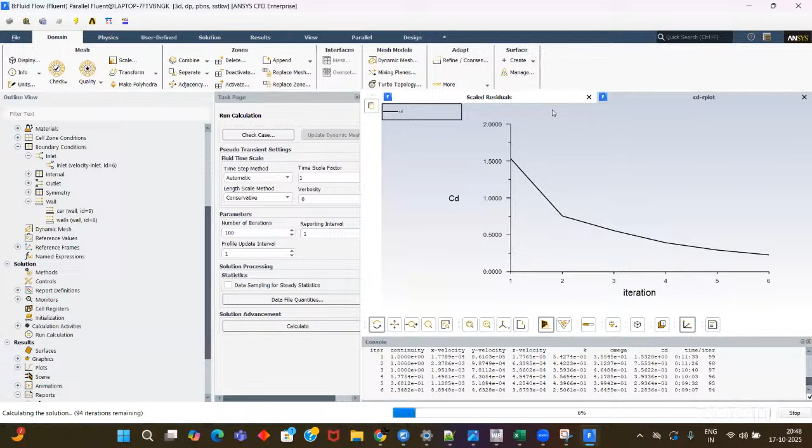Yeah, so this is running. Let it show some kind of converged result that we can interpret. I think it will show similar ballpark values for the drag. Let it happen. Around 20 iterations, then we'll get a ballpark value result.

So we get some sort of clarity. Let us do 5 more iterations maybe. It is almost a straight line. We can conclude it. So what is the drag? 0.14. So let us see here. It was varying a bit, so further mesh refinement is needed. That is what we can sense from this. Mesh independence is the point where, after further refinement of your cases, your results stop varying. That is how you conclude it.